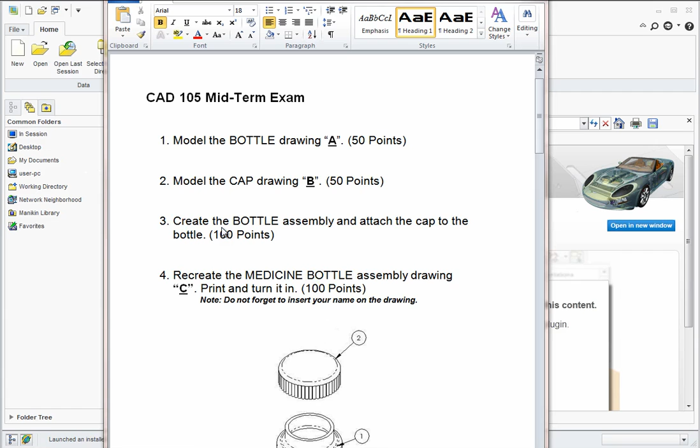First, you're going to model a bottle, found in the sample files under midterm as a Word document. This is the bottle we're going to model: 2.5 inches high by 2 inches in diameter. It's a cylinder, with another smaller cylinder placed on top, 1/2 inch thick and 1.5 inch for the neck. We'll put rounds of about 0.1 on all these edges, then shell it out.

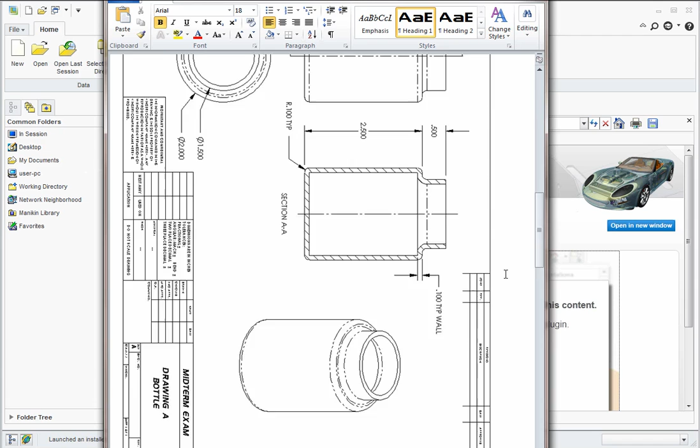The next part of this exam is modeling the cap, which has some details such as a circular pattern. Then you'll put together a drawing that we see on the last page, and you have to try and recreate this drawing as closely as possible.

Okay, let's go through that. I'm going to start with a new part file and call this the bottle.

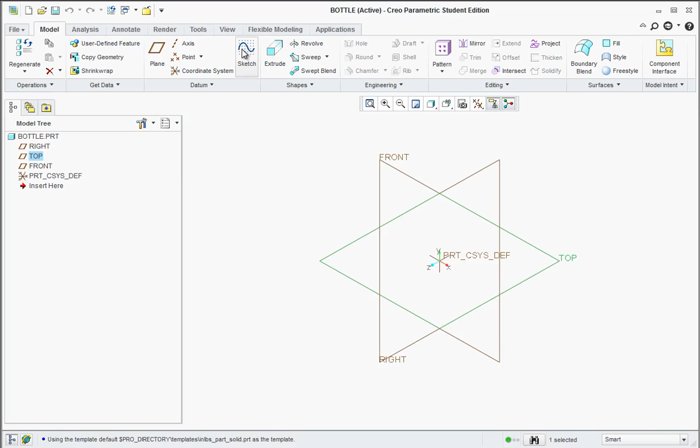In this case, unlike most exercises where I have you sketch on the front, I'd suggest starting on the top plane and drawing your circle right at the origin, dimensioned at 2 inches. Hit OK, then extrude that 2.5 inches high.

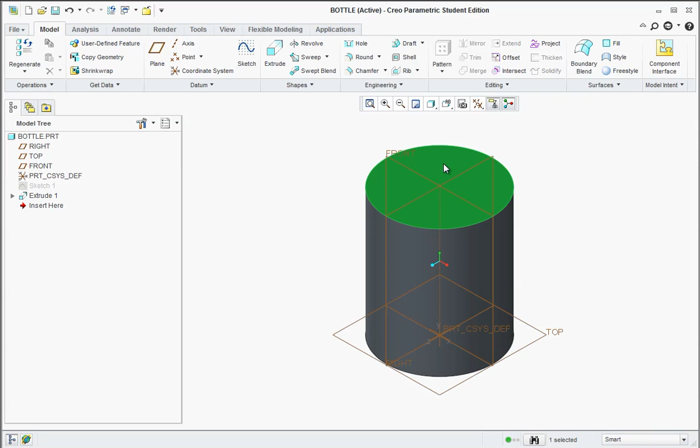Now select this surface on the top and start a sketch. Draw another circle at 1.5 inches, hit OK, and extrude that 1/2 inch high.

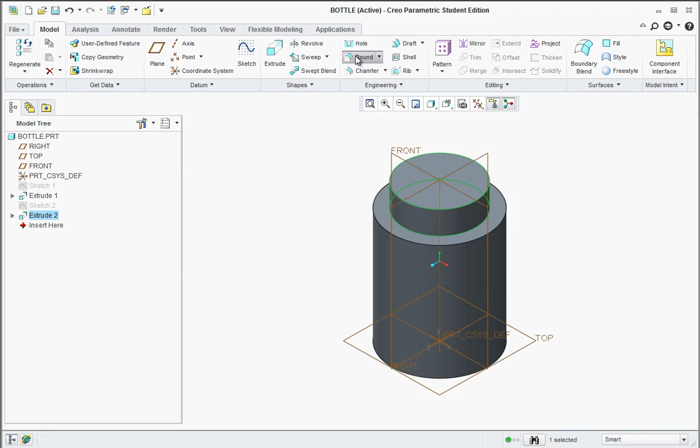Now that's complete, let's go to the round tool. The rounds are going to be 0.1, applied to these three edges. Don't put one on the top edge, whatever you do. At this point, let's turn some things off so we can see more easily, and go ahead and shell it out.

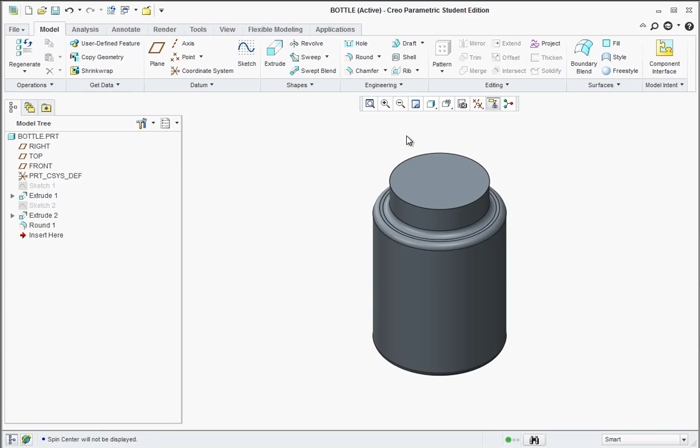Up until now we haven't had an exercise that officially used the shell tool. Let's go to the shell command, right up here. Click on shell and specify the wall thickness - in this case 0.1. Make sure you select the face that needs to be opened. If you fail to select this face and try to add another shell, you'll find it's already shelled out in the center and it will error out.

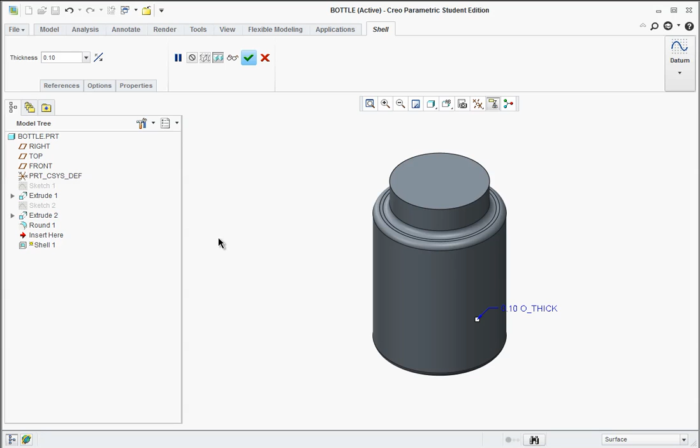So you have one of two things to do: delete the shell feature in the tree and start over, or right-click on the shell and edit the definition, then select the top face to remove. Make sure you select the top face to remove first, then hit the green check mark.

Okay, now that's worth 50 points. Let's start the next part, which is the cap.

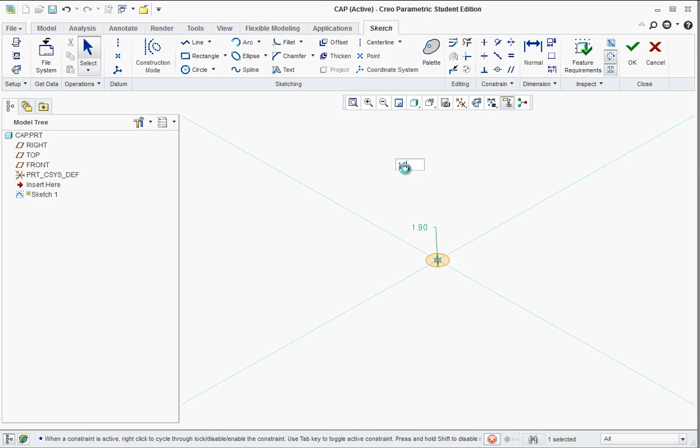For the cap, we're going to start just like the other one, on the top plane, and start a sketch. The cap is a 1.9 inch diameter, so draw that out. Then that gets extruded - hit OK, go to extrude, and it gets extruded 0.1 high.

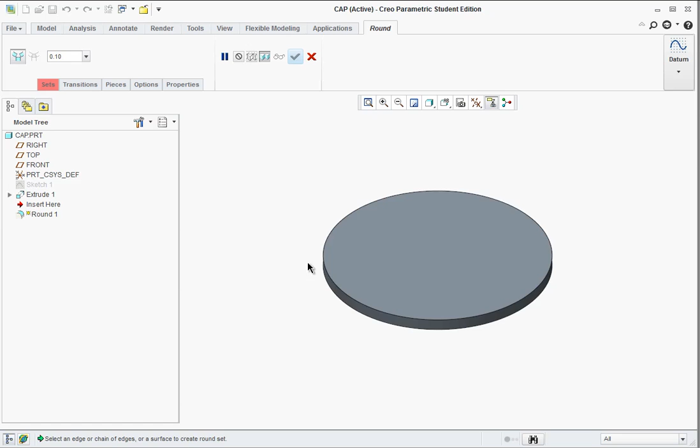While still in this view, click on standard or default orientation if you've rotated it, so you can identify the top right away and not build it upside down. Go to the rounds tool, set it to 0.1, and click on the top edge. This will help you identify the top and also save you 10 points in case you forget that round, plus it helps identify top from bottom more easily.

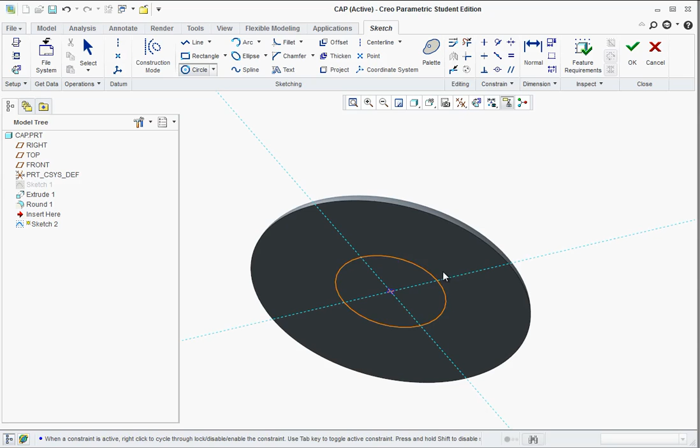Now select this underside face and start a sketch. The next diameter is going to be 1.8, not 1.9, off the center - a little bit smaller. Hit OK, go to extrude, and it gets extruded 0.5. Do not try to draw the center circle at 1.5 until it's extruded - it cannot be in the same sketch because they're different thicknesses.

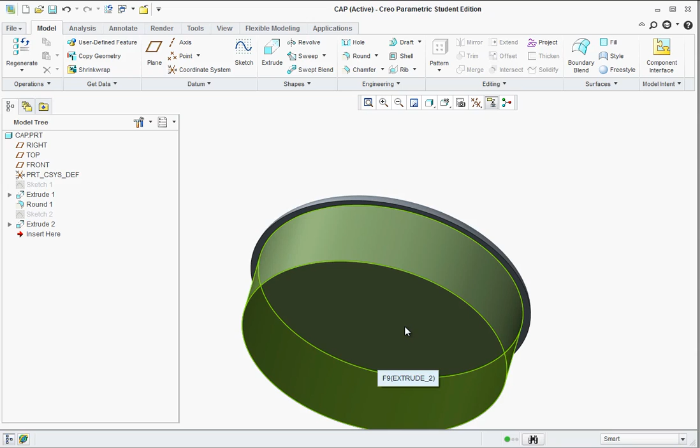So now you can select that bottom surface, start a new sketch, go to the circle tool, and draw the 1.5-inch diameter.

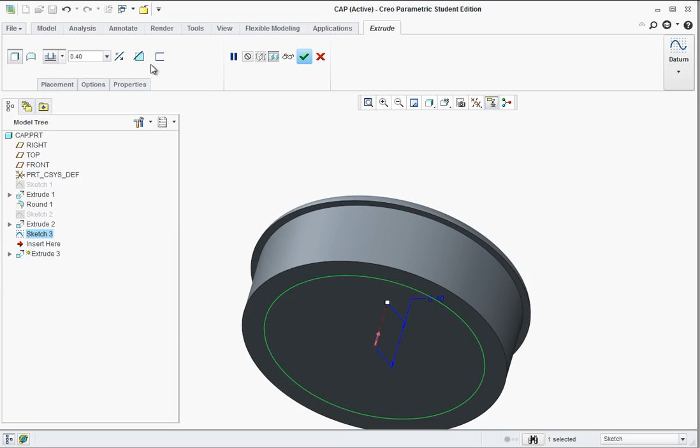Hit OK, Extrude. Flip the arrow here by clicking on it, and it's only going to go 0.4 deep. Make sure you select Remove Material and hit Apply.

At this point, you're just looking to put in the ribs, and this is where many students stop because they can't remember how to put the circular pattern in. Remember, this is only worth 50 points, this one part, and that is only 20 points of the 50. So if you can't remember how to put the circular pattern in, move on to the assembly. You still could finish it even though you don't have the ribs on it. So don't stop at that point.

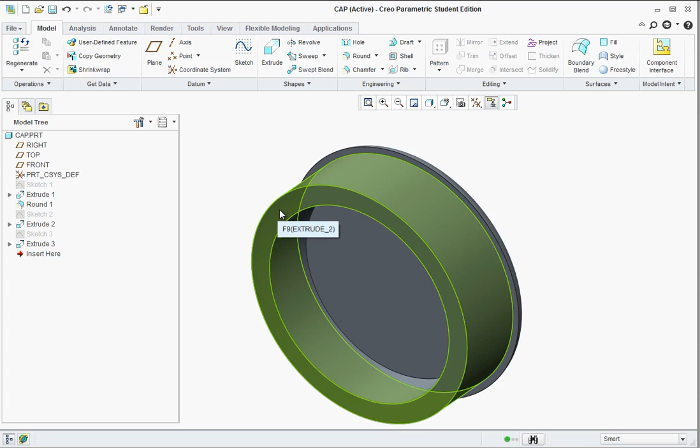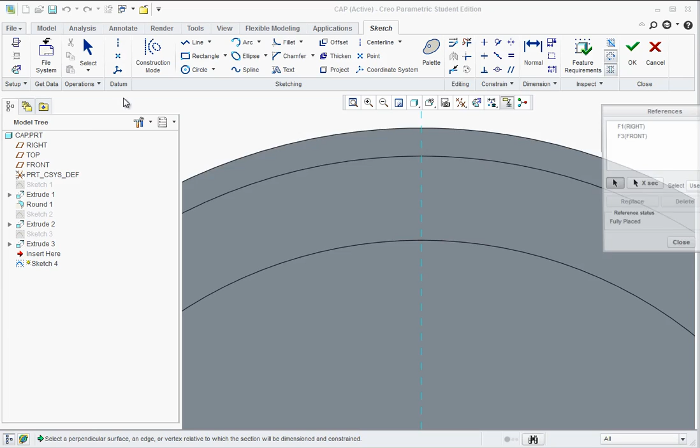This is where we could use our References tool. If you click on References, you can now select the edges on the top and bottom circle. Hit Close, and now try and put your circle in. You should be able to snap to that quadrant there, and then snap this and get a little T that's to the left of the pointer. The T indicates tangency. This way, you don't have to put the dimension in later.

If you didn't get the T, then you'd have to go to normal and put in the dimension of 0.1. Actually, you wouldn't have to put that in—it would come up automatically.

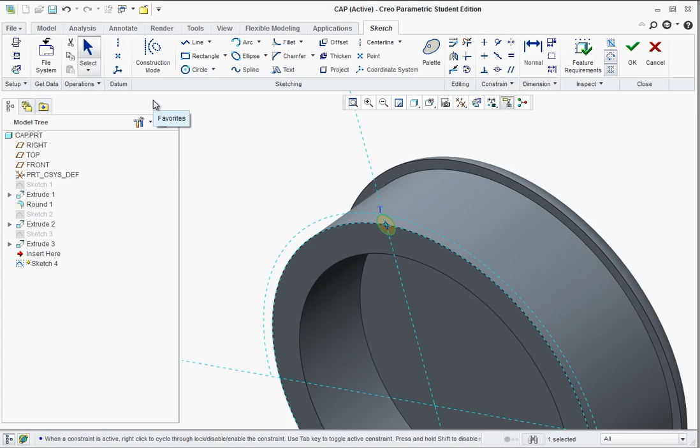But regardless, next part is we're going to hit OK, go to Extrude, flip the arrow, and instead of putting in 0.5, you could just put it up to the next surface. You could select that and hit the green check mark.

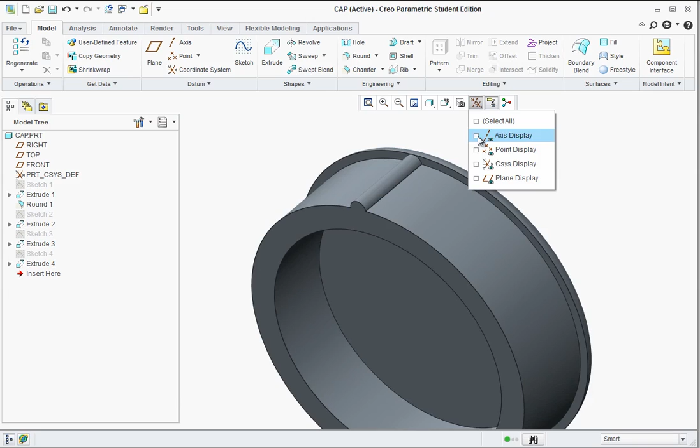Now we can pattern this. But before we pattern, let's go ahead and turn on your axis display, and select the Extrude 4 from the feature tree, or you could click on the surface here, either one.

Go to Pattern, and instead of Dimension, hit the little arrow to the right of it and find Axis. Make sure you select the axis in the center. Remember, if that's not there, you could go up here and turn on Axis Display.

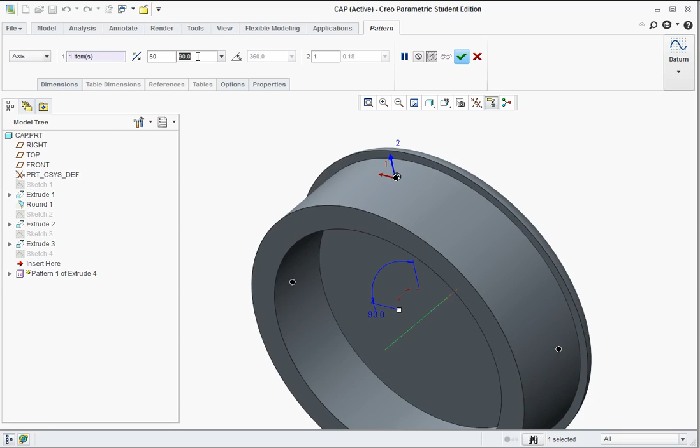Now we need 50 instances, and so we need to have them split up around the outer perimeter. So you could type in 360 divided by 50 and hit Enter. It'll give you the 7.2. Go ahead and hit the green check mark to apply.

And now you could go back and turn off the axis display if you don't want to see that. And that's worth 50 points. Move on to the assembly next.

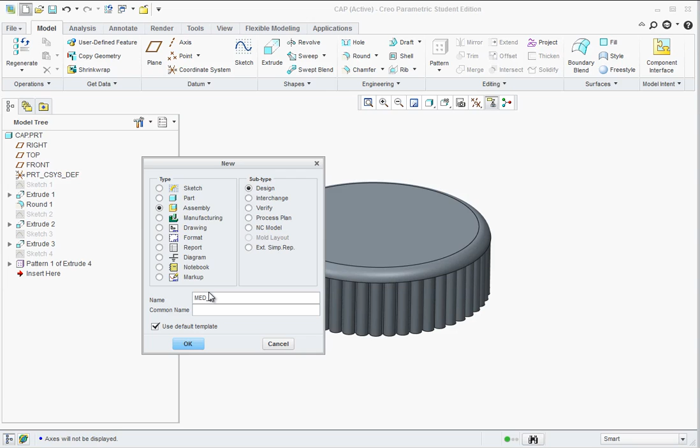Click on New, Assembly. I'm going to call it the med underscore bottle. Hit OK.

Just need to resize this for the video. Okay, and at this point we go to Assemble.

And if you're looking for your parts, go to In Session unless you saved them already. But if you go to In Session, it will find them both there. We have the bottle, which we want to bring in first, so hit Open.

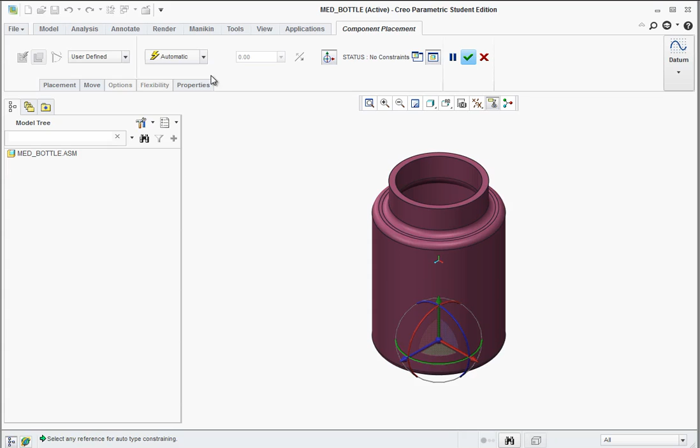And in this case, your best bet is to click on, instead of Automatic, go to Default and hit the green check mark.

Now go back to Assemble, In Session, Cap, hit Open. And my recommendation is you bring this up—just drag it up with the manipulator handle.

And if it zooms out of view, go back to standard view orientation. Or we could do fit to screen.

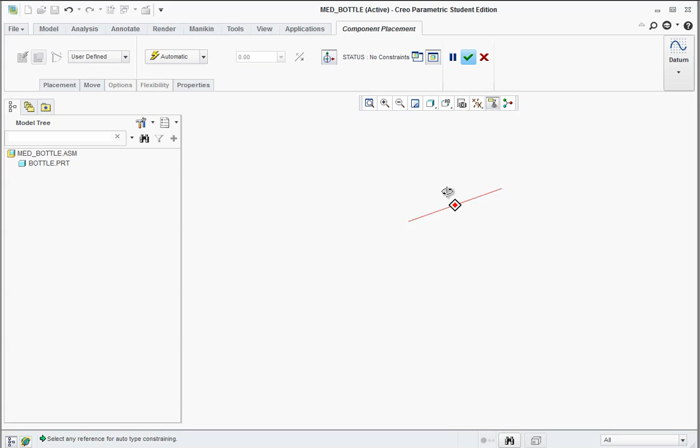Okay, now what we're going to do with this is we're going to align this cylindrical face concentric to this face. And then finally, click on this face and go back to the standard view orientation.

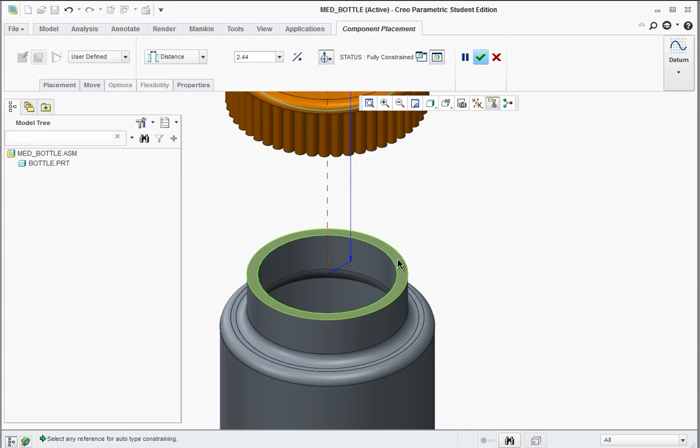And you want to mate that underside face to this face. You're going to set it to coincident and hit the green check mark to apply.

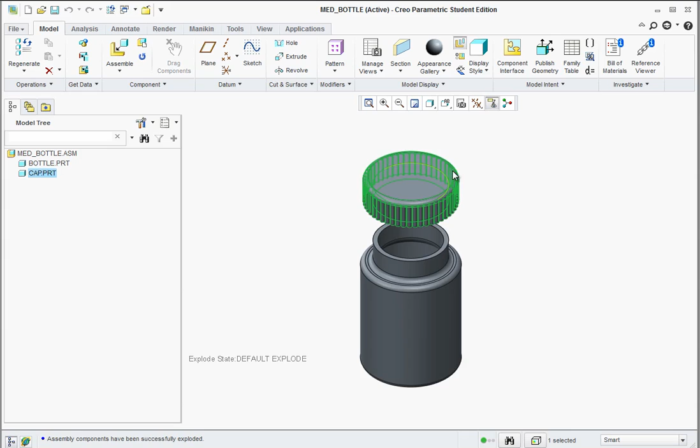Alright, at this point we want to explode this. You'll find Explode View up here, right next to that little sphere. Go ahead and click on Explode View, and it will automatically explode it for us in this case. There is a way to manually explode as well, but this is good enough for right now—we'll learn that in the advanced class. Once it's exploded, you could click on Explode View again to unexplode the view. Now you've just earned 100 points on that.

Let's now create the drawing. Go to New, Drawing, and just call it med_bottle, empty with format, browse, and select the A format, and hit OK.

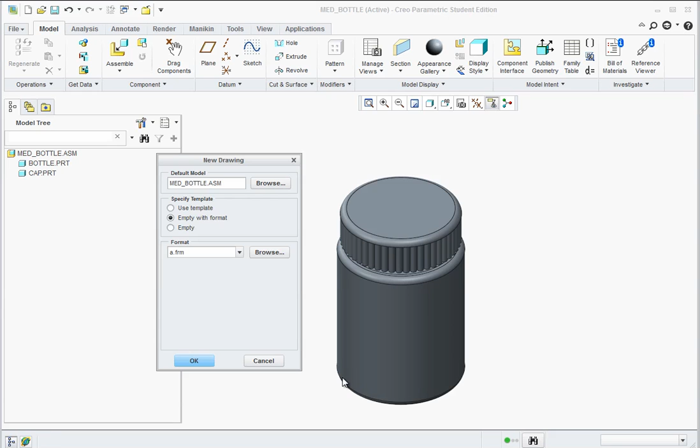Now at this point, we're going to insert the model view. Go to General, hit OK, left click where you want to drop this view, and we're going to go with the front view here. Just hit OK—actually, yes, we can hit OK at that point.

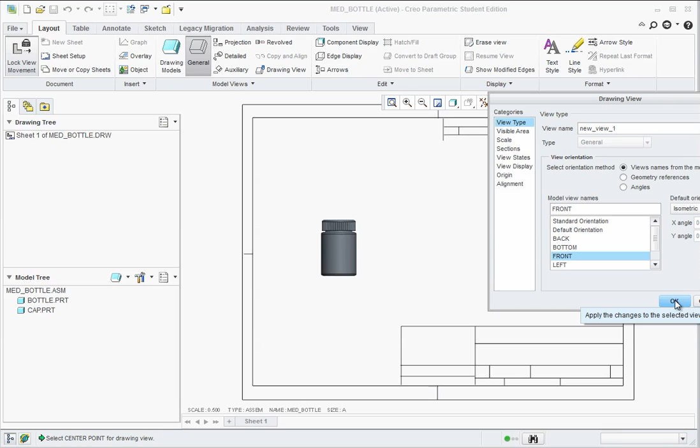Now if you want to change the scale, you can click on Scale down here. Actually, if you double click, it comes up here. Let's change that to 0.75 to make it a little bit larger.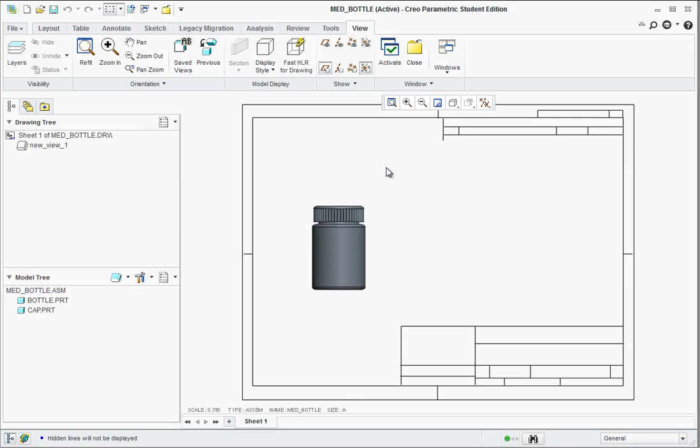We could also go up to the View bar and under Display Style, click on No Hidden. Then if you zoom out, it will refresh the screen.

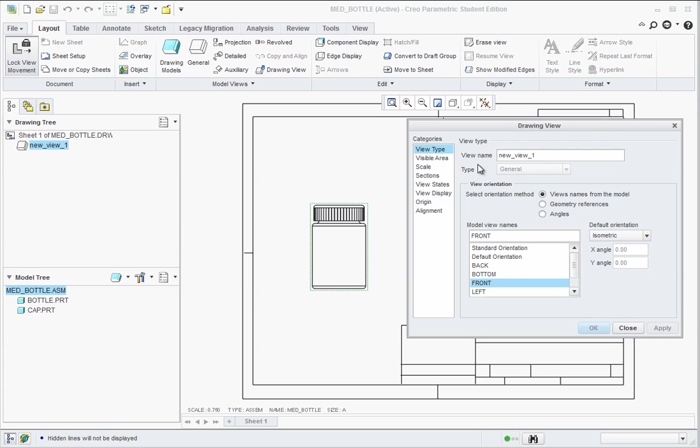At this point, let's click on the layout and then double click on the view. If you get this little message, just hit the little red X in the upper right corner. Double click on it again, and under View Display, under Tangent Edge Display Style, turn on Phantom. Hit Apply and close. This will help it look a little bit better—it puts little dashed lines in there.

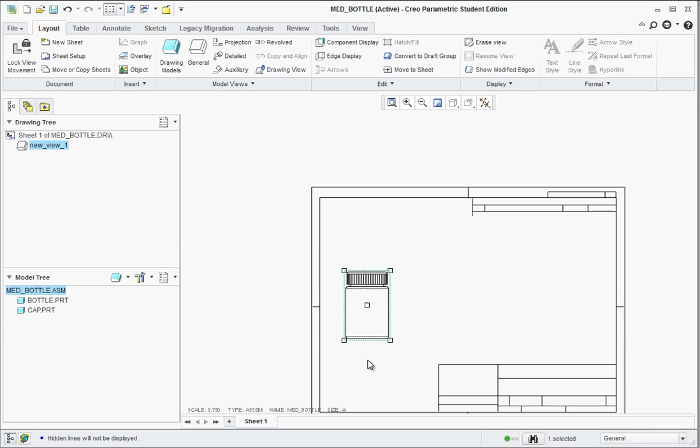Okay, we're going to unfold additional views here. If you want to drag this, turn off Lock View Movement, and now you could drag it around. Now we want a bottom view, so for that we could go to Projection and drag off the bottom view.

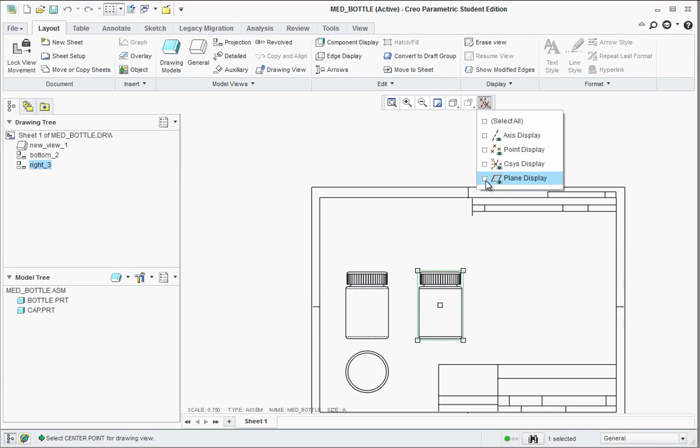And then we're going to drag off the section view here. So we could click on this view, go to Projection, drag it off to the right, and click. Before you double click on that, go up here to the Datum Display Filters, turn on Plane Display, and then zoom in and out again. Now you could double click on this view.

What we want to do is create a section view. Go to Sections, 2D Cross Section, hit plus, and over here on the Menu Manager you'll get some options—create cross-section view. Go ahead and just hit Done. Now there's two ways you could do this: you could actually do this from the actual assembly and create a section view and just call it up, or in this case we're doing it right inside the drawing. So at this point we have to give it a name, and since this is our first one, we'll call it A up here at the top and hit the green check mark.

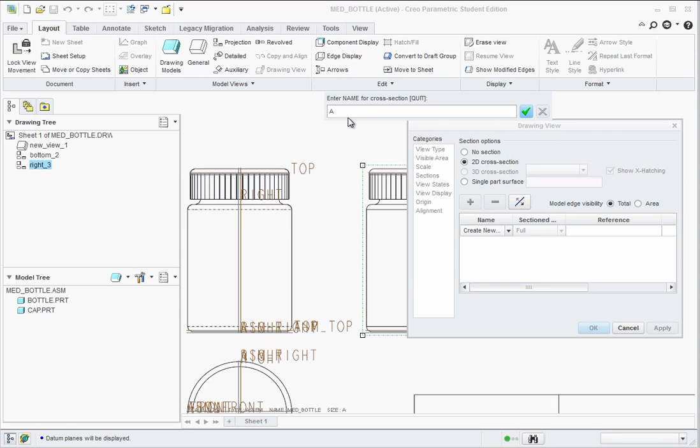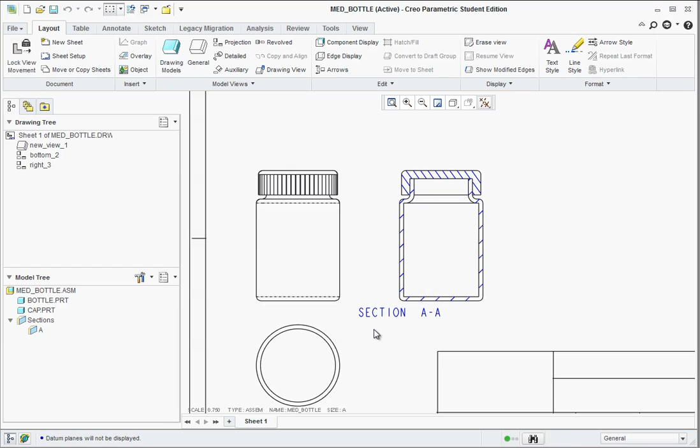Now the menu manager is asking us to select the plane, so don't click on anything here. Just move your pointer over here to where it says Assembly Right. Click on Assembly Right, you'll get a little green check mark, hit Apply, and then close. Now you can turn off the plane display, zoom out, and there's your section. Move this over here. Okay, now a detail view.

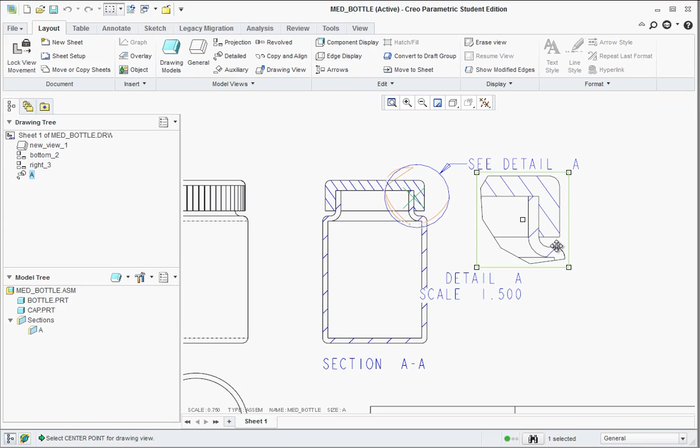Let's zoom up to this region, go to Detail, click right on this little line here, and starting at 12 o'clock, go backwards counterclockwise to 9, 6, 3, and when you're about at 3 o'clock, middle click, move your pointer to the right, and click to drop the detail view. Then center the text—make sure nothing is overlapping at all.

Okay, we're going to insert another drawing view, so go to General View, hit OK, left click right here, and you see it's bringing up an isometric view. That's good, that's what we want—make sure isometric is selected. Then if you go to View States, check on Exploded Components in View, hit Apply, and then hit Close.

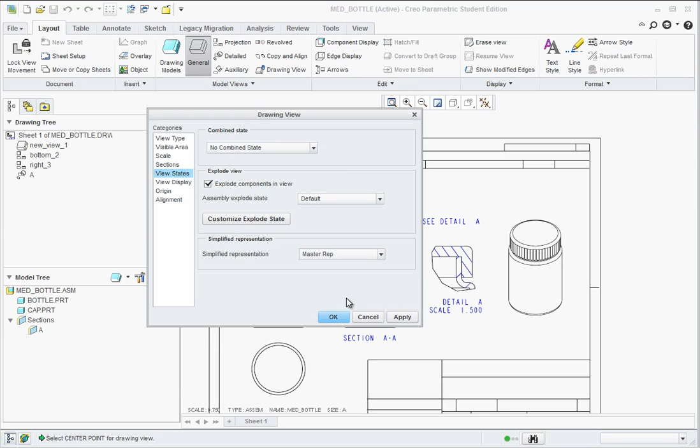Alright, we're going to go ahead and add some balloons to this for the notes. Click on that view and go to Annotate—actually it's under Table—and we're first going to add the table.

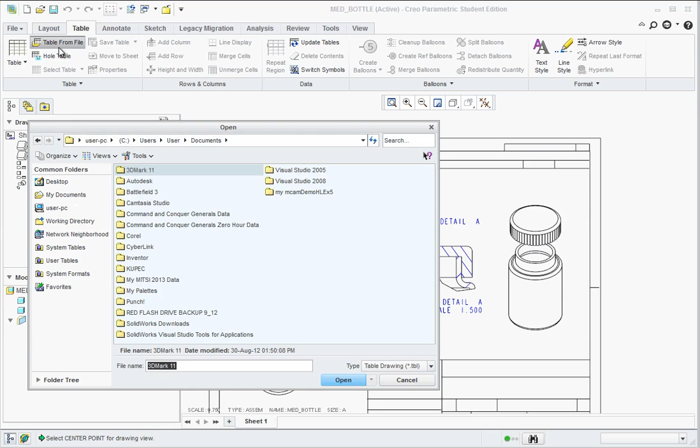We're going to click on Table from File, and find this table on your flash drive, or go to the W Drive, CAD classes, Sakura, Pro/E Creo, CAD 105. Inside the CAD 105 folder, find it here, find sample files, then find the midterm or the final—either one, they have the same table.

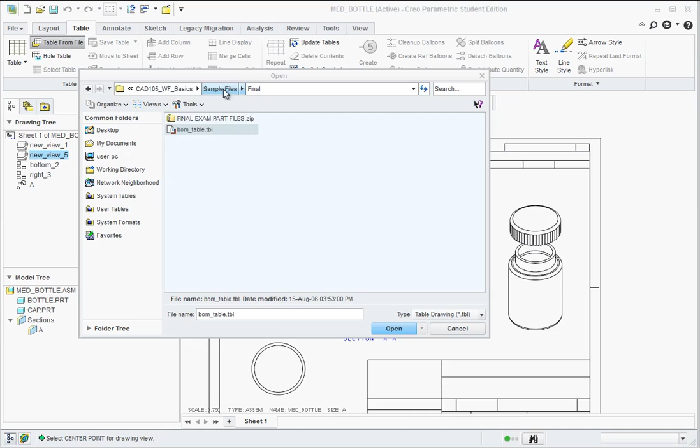In this case I had to go back to the sample files since I didn't have it in the midterm folder, so just go to the final folder, find the BOM table, and hit open.

Unfortunately I can't do it here because I don't have the right version to apply that, but at school you should be able to retrieve that and it will bring up the file for our bill of materials, and it would just drop in the lower left hand corner.

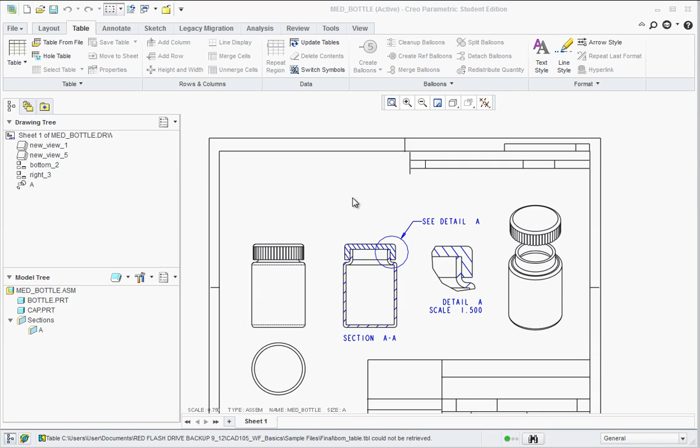At this point, if you want to put a table in here, go over to the table tool and select how many cells. We're going to have a quantity of 2 plus the title cell at the top, so that's 3 cells, then part number, part name, and quantity—so a total of 3 by 3.

Click on that, then click up here to drop it. Now you can double click in each cell—this one is going to be part number. Double click in this cell for the name, and then QTY for quantity. If we want, we could actually change this to part name.

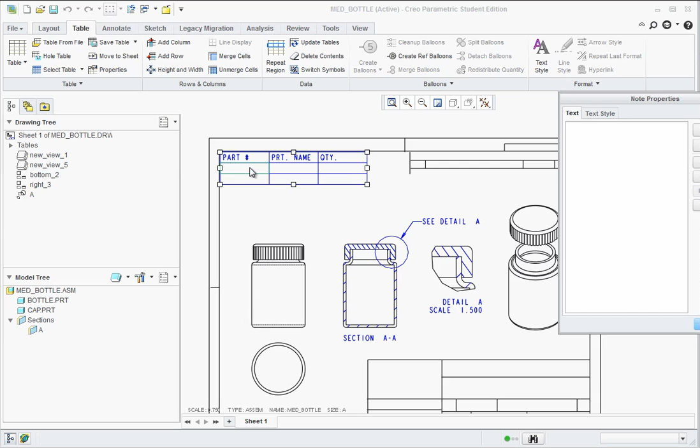If you ever need to adjust these cells, right click and it will give you options to expand the cell. Next we're going to type in 1 and 2 for part numbers. For part name, the first one is going to be the bottle, the next one's going to be the cap, and there's a quantity of 1 of each. Just double click in here and hit OK.

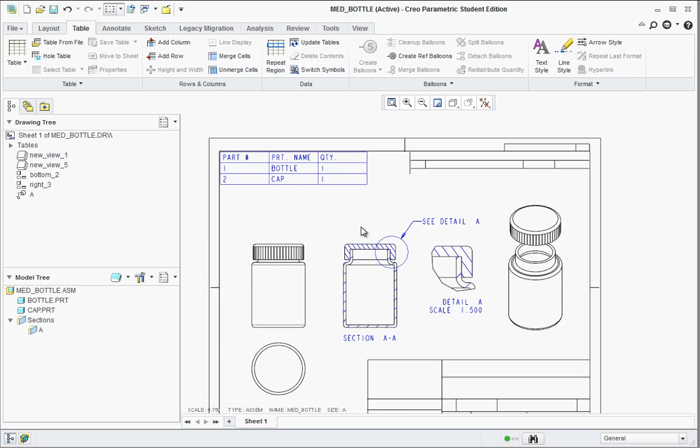For the balloons, since we're adding them in manually, click on the annotations button and find balloon note, select that. Over on the right you have the manager, and we do want it with the leader—leave the rest as default. Hit make note, click on the edge, and over here you get an option, hit OK.

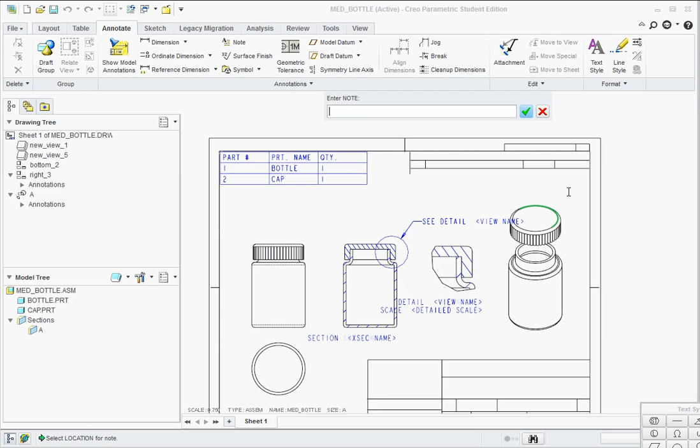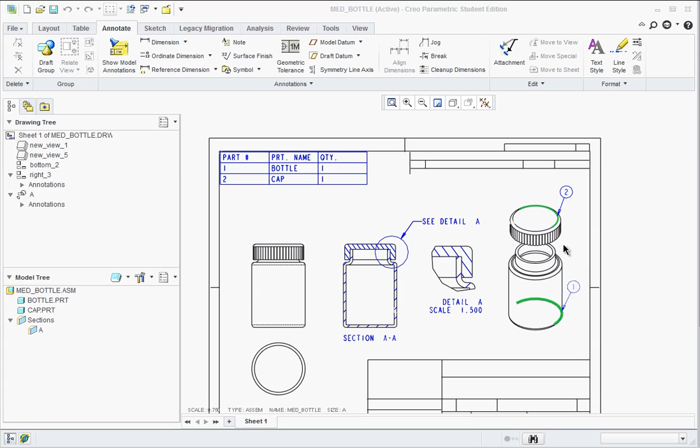Middle click where you want to drop it—in this case this is for the cap, which is part number 2. Type in 2 and hit the green check mark twice. Then in the menu manager up in the upper right, do the same thing: make note, select this edge here, middle click, and that will be part 1. Hit the green check mark twice, then hit done and return on the menu manager.

Now you can click on these notes and just drag them to relocate. You're welcome to use the actual bill of materials that's automated at school—unfortunately I'm not able to use it here on my home computer that I'm recording this on. But let's go ahead and finish this off with a note.

Click on the note tool, then hit make note. Click right in this cell where you want to drop your note, and proceed to type in your name. Hit the green check mark twice, and hit done and return.

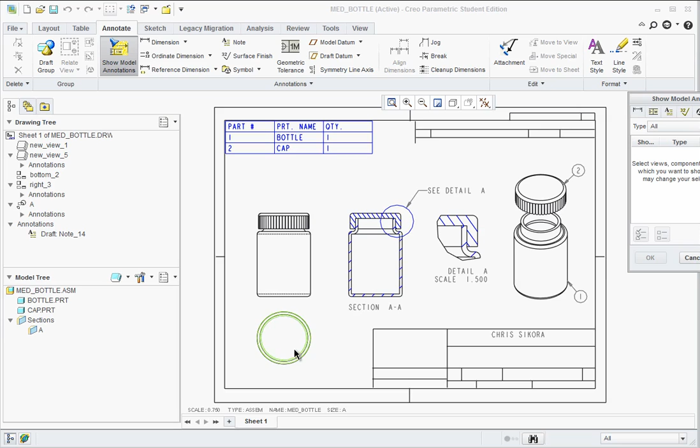An additional thing I'd like to do here is put a center mark on this view. Go to Show Annotations, select from the Show Annotations option this Datum tab, then click on this view and it will show the center mark. Just click on the center mark itself to activate it, or hit the green check mark and hit apply, then hit cancel to close out of it.

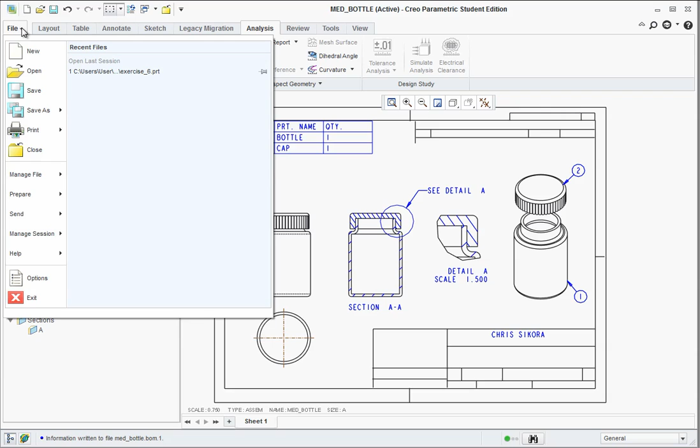At this point, we're ready to print. To print this out, go to File, Print, and hit Print Settings / Preview. Make sure it looks good, then hit Print, and select the default printer, which will be the LJ5200 ATC208. Hit OK, and that should be it. Turn it in—that ends midterm.